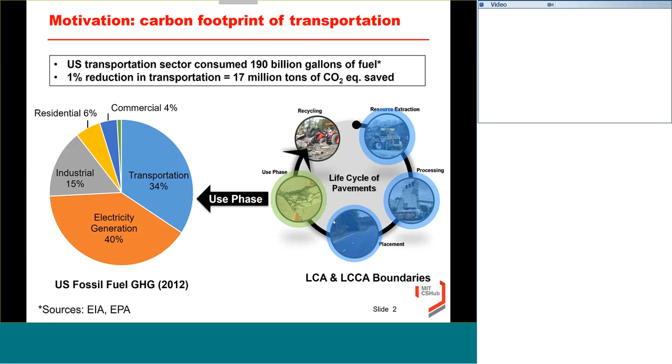On the right side of this slide is the life cycle of the pavement. We start off with some materials that we're extracting, we process that, and that becomes a pavement, which we're placing. When that pavement comes into use, it comes into contact with all the vehicles driving over it. What's actually happening is that vehicle fuel economy translates to pavement fuel economy. So pavements with more positive behavior towards vehicles induce less fuel consumption, and pavements with higher roughness, for example, induce more fuel consumption for those vehicles.

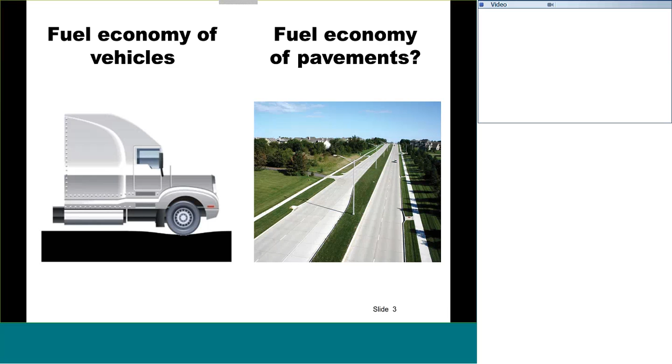This impact of pavements on fuel consumption boils down into two main mechanisms. One has to do with the pavement structure. So when, for example, a truck is driving over pavement, that pavement deflects under the weight of the truck, be it really small and minuscule. It's still a deflection, and there is still some energy that pavement absorbs from that truck.

You can picture this as riding a bicycle on the beach versus riding a bicycle on pavement. It's much harder to resist the resistance of the sand on the beach, same with walking, than it is on pavement. The same thing happens because of the heavy weight of the truck on different kinds of pavements, and that induces excess fuel consumption. Another mechanism is pavement roughness.

When you're driving on a smooth road, your car isn't bouncing up and down, and there isn't energy being transferred from the vehicle's vertical motion that's translated into excess fuel consumption. A much rougher road will induce more excess fuel consumption because the car has to bounce up and down, and there's energy lost in the suspension system. Whereas on a smooth road, you don't have energy going into the suspension, and that's not causing excess fuel consumption for us.

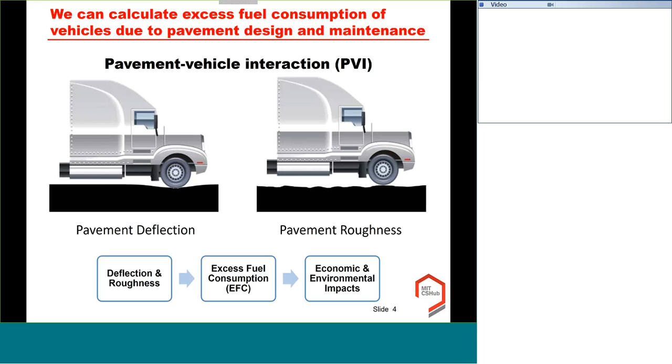So what we do is take the deflection properties, or the structural properties, of the pavement, and the roughness properties of the pavement, and translate them into excess fuel consumption for different vehicle classes and different roads. That translates for us into economic impacts or environmental impacts, whatever we're looking at through the life cycle of these systems.

So let's talk about deflection-induced PVI. One thing I should note is that roughness-induced PVI has been studied extensively, and there are accepted models for translating a certain roughness of a road to a certain level of fuel consumption for different vehicle classes. It's been studied and understood more because there are generally a few parameters that describe the relationship of roughness with fuel consumption: the parameter of road roughness itself, and the parameter of vehicle class. That's pretty much what breaks down the roughness impact on fuel consumption.

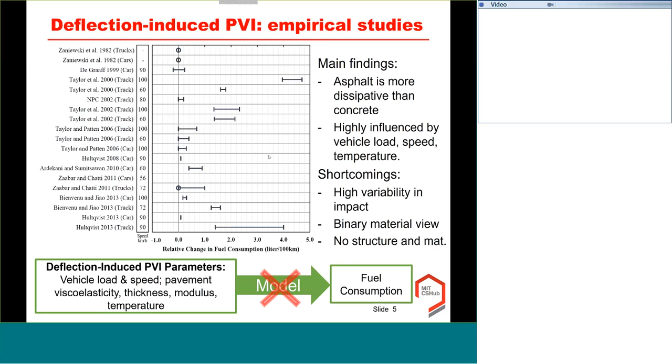What I'm going to present today is how we developed that model and what are the implications of this pavement vehicle interaction. The different elements of my presentation today will be around the development of this model for defining pavement vehicle interaction and its deflection impact, how we validate that model and the work we've been doing around that, and the work that's still ongoing.

I can talk about that too. We have implemented these models that we've developed for projects and for networks, and they have different implications, and I'll get into that and the sensitivity of these models.

Before I start, I'm going to jump into the takeaways and center my presentation around these. The first takeaway is that we can actually quantify this excess fuel consumption, be it for roughness impacts or for deflection impacts. We can quantify it with enough confidence to be able to make judgments based on our modeling.

We find that excess fuel consumption is quite significant when we compare either the excess fuel consumption cost compared to the investment we have to make initially to either rebuild the pavement or fix the pavement, or when we compare the life cycle impact of recreating a pavement versus all the losses from that excess fuel consumption and excess greenhouse gas emissions.

Another finding is that both the surface properties, which induce roughness, and the structural properties, which induce deflection, induce fuel consumption. Both of them matter, and they matter differently in different conditions, and I'll talk about that context sensitivity.

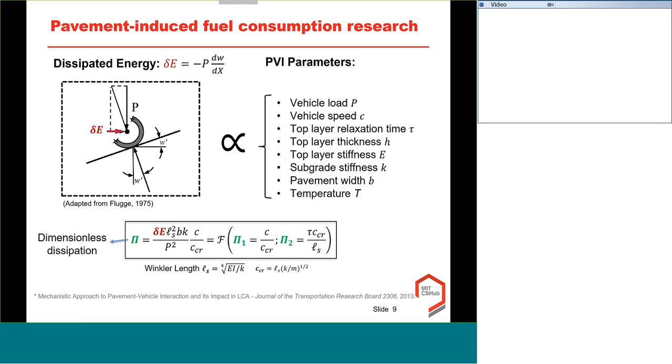All right, let's talk about model development. I'm not going to get into the depth of the equations. If there are questions, I'm happy to answer them. But the parameters that we have here are here on the right.

Like I said, there are many parameters that define what a vehicle behaves like and also what a pavement structure behaves like. These parameters include vehicle load, the speed, the relaxation time, which has to do with the viscoelasticity of the top layer, so asphalt versus concrete, for example.

The thickness of the top layer, the stiffness of the top layer, the stiffness of the subgrade, and also geometric properties about the pavement width and the ambient temperature or the pavement temperature. So all these parameters define our pavement vehicle interaction as far as the structural dissipation goes.

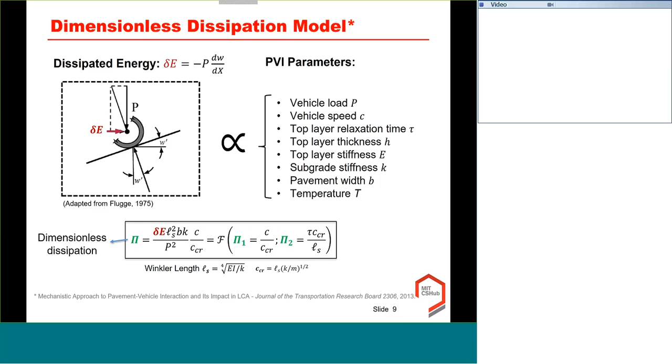So we have created this model that has a few different properties, but the main three advantages I want to talk about is that because it's a mechanistic model, it allows us to come up with scaling relationships between the dissipation, or that excess fuel consumption, and the parameters of PVI.

That scaling relationship is what I'm showing in this equation up here. And what it defines is that our dissipation form, or dissipation, either in dimensionless form or in terms of the dissipation itself, that delta E, is related to the vertical load, but not just linearly, with a square relationship. And it's related with an inverse relationship with the stiffness, the thickness, and the subgrade stiffness.

So, top layer stiffness and subgrade stiffness. What this relationship means is if you increase the load of a vehicle by 2, the amount that you're increasing that excess fuel consumption is by 4. So there's a power of 2 between the load and the dissipation. Similarly, if you increase the thickness of a pavement, you decrease your dissipation to a power of minus 3/4.

And if you increase the modulus of elasticity, that has a negative impact—increasing the modulus of elasticity decreases the dissipation. And improving the subgrade properties through K will reduce dissipation again. So it's a relationship, but what it helps us do is figure out what is the most important parameter that we can influence to change the excess fuel consumption, either within the structure of the pavement or within the vehicle.

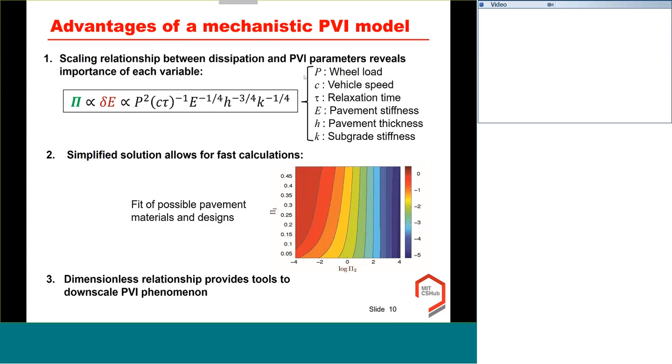The last important part of how we set up this model is that because it's dimensionless, we can scale the PVI phenomenon. Dimensionless properties of equations have been used to scale, for example, a jet down into something that can be put into a wind tunnel. We're doing something similar—using a dimensionless relationship to downscale this phenomenon, which happens at the scale of asphalt and concrete with 7-8 inch pavements, into something we can work on in the lab.

An important finding about the implications of different pavement scenarios and temperature conditions is shown in this graph. On the vertical left side I'm showing excess fuel consumption, and on the right side, temperature. These are data from California. Throughout a year, the temperature changes from around 5 degrees Celsius to 20-some degrees Celsius, and the impact of that on excess fuel consumption for asphalt concrete pavements or Portland cement concrete pavements is shown here—AC is asphalt, PCC is concrete.

We see that asphalt, because it's viscoelastic in nature, has a high dependency on temperature fluctuations—its excess fuel consumption is really dependent on temperature. If we looked at Colorado or another cold state, the excess fuel consumption wouldn't differ much between asphalt and concrete, because it would be much lower overall. But in this case, and in the majority of the US—we've done national studies as well—asphalt is highly dependent on temperature changes, and it's also dependent on speed changes. When a car is driving slower, it has higher excess fuel consumption than when driving faster.

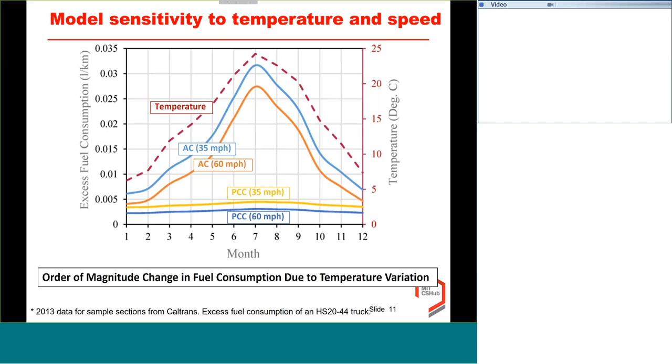But these are the things our model is showing, and we need to validate that for a real physical pavement model. A pavement is defined by a structure that has multiple layers, and these layers can generally be categorized or grouped into certain definitions.

Here on the left, I'm showing representations of what we'd expect to see in the US network, or roads generally, as a structure. We have a top layer that is either bound asphalt, concrete, or a mix of both—a composite section—and that's sitting on some soil. That soil is either compacted or treated with cement or asphalt, but it's generally an unbound base, sub-base, or subgrade.

So we're taking this two-layer representation of a real-life pavement and creating an experiment around it, shown on the right—two layers of polymers sitting on top of each other. We have a wheel moving at a constant speed, like a truck or car wheel would, and what we're measuring is the resistance against the motion of that wheel. I'll come back to this.

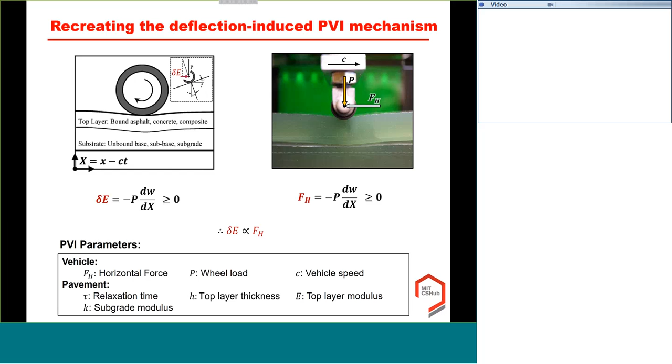The wheel load is what we simulate in our experiment. We have the vehicle speed, which we simulate as well. We have different materials that define different relaxation times - highly viscoelastic materials more like asphalt, intermediate materials, and materials that are almost elastic, more like concrete. We have worked on a variation of top layer thicknesses to investigate its impact on excess fuel consumption, and our different materials give us different top layer moduluses. We generally have one typical subgrade that we run our study on.

So our experiment is that wheel being moved back and forth on different pavement types and pavement thicknesses, and we're measuring that resistance to the motion of this wheel. Here in the video there's a little bump, but generally we worked with one thickness across back and forth.

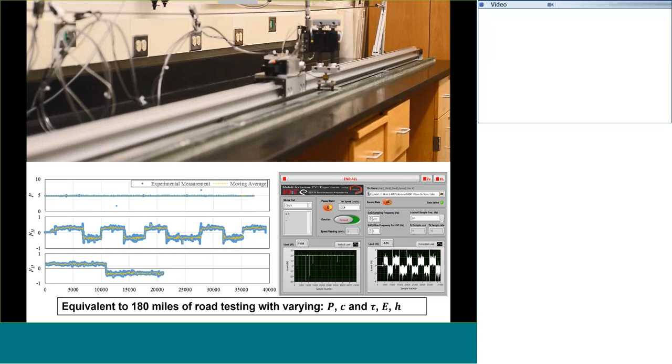A nice thing about doing this experiment indoors rather than taking a truck or car outside is that a lot of those external parameters, which we haven't even included in the experiment, are controlled here. The pavements all have a very smooth surface, so there's no impact from roughness. There are no temperature changes within the lab - it's very temperature controlled. A lot of other parameters, like the weight of the truck or the wind, which would change the fuel consumption in a real study, and impacts from tire and so on, are neglected by recreating this PVI phenomenon in the lab.

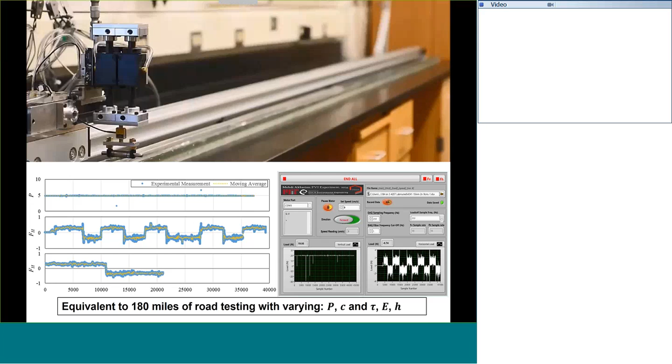If you were to upscale the size of this wheel and all the back and forth testing we've done across all these tests, it would be equivalent to a study that drove 180 miles while varying all these different parameters in real life. So that's a benefit from scaling this experiment down.

Another benefit is because we're using polymers here, we can actually look through some of them. Some of these polymers are transparent and birefringent, so we can use a polarizer setup, so to use photoelasticity to look at the stresses inside these materials. The setup is shown on the upper right, made up of polarizers and filters and so on, and on the left you see the wheel moving back and forth on this pavement.

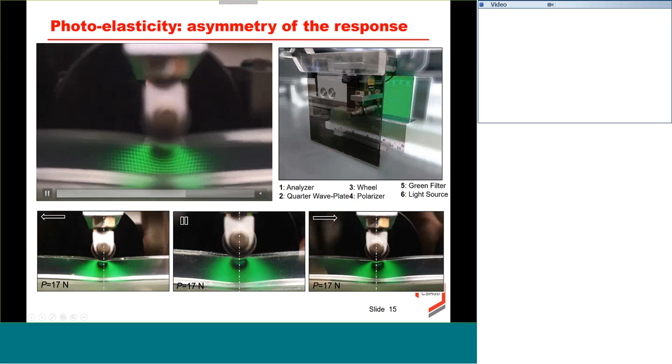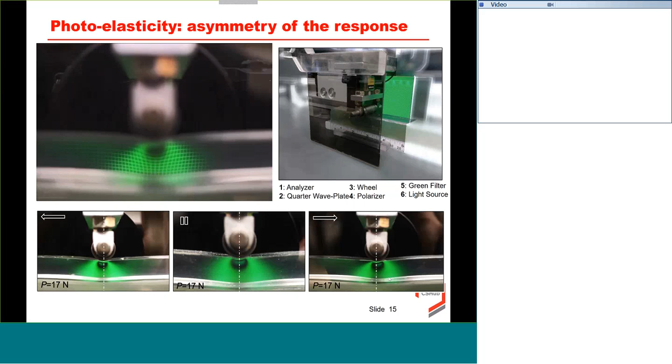It's changing direction quite often, and what it shows is the stresses inside the material. In the stills on the bottom, there's a higher body of stresses on the left side of the wheel, in front of it and behind it. When the wheel is moving to the right, you see a higher body of stresses resisting its motion, and you can see that really clearly when it switches direction in the video. When the wheel is stationary, everything is symmetric, but it's that combination of viscoelasticity in the pavement and the motion of the wheel that creates an asymmetry in the pavement response.

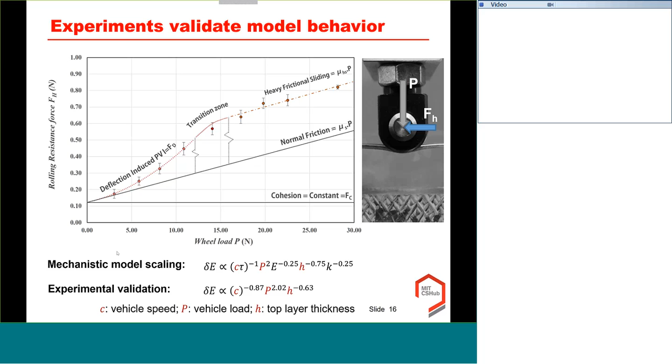In the quite elastic case, which represents concrete pavements, we also see good agreement between model predictions and experimental findings. This was validation from a laboratory experiment. There's also a validation effort in California with Caltrans, driving cars and trucks on pavements. We're involved in the modeling and comparisons with a couple of universities. I'm happy to address questions about that.

This model, validated experimentally, was also calibrated based on actual pavement data and used in project level implementation. Let me explain what I mean by that. Generally, when looking at a life cycle of a pavement, we start with some pavement structure that we think is right for the traffic it's going to carry.

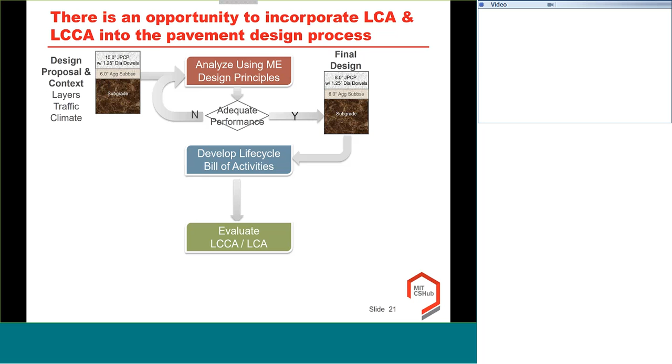Now what we're trying to do is bring the evaluation of life cycle cost assessment and environmental assessment into that performance judgment. So adequacy of performance has to meet the demands of the traffic, but also the cost demands and environmental footprint demands of the community, the DOT, or any agency looking at these roads.

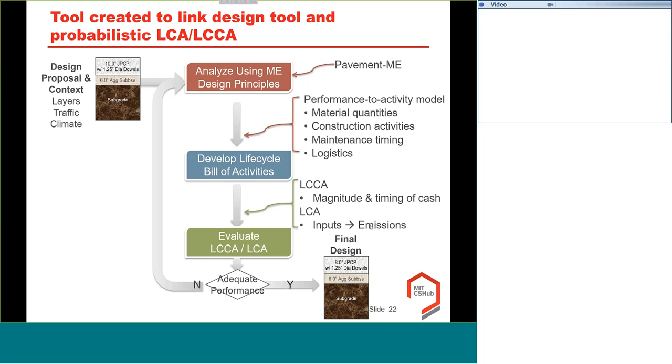We look at all the material quantities that go into the construction activities, when they happen, and what decisions have to be made. Then we figure out how much money goes into this life cycle and how much emissions come out of these practices because of this pavement design. We run these scenarios for many different pavement cases.

For example, here I'm showing the impact of life cycle cost assessment for a pavement scenario we studied with Minnesota. Here we have a concrete pavement and we're looking at the life cycle costs. We see that the majority of the costs are dominated by the initial investment on the pavement, and then there is some maintenance cost, around 16%.

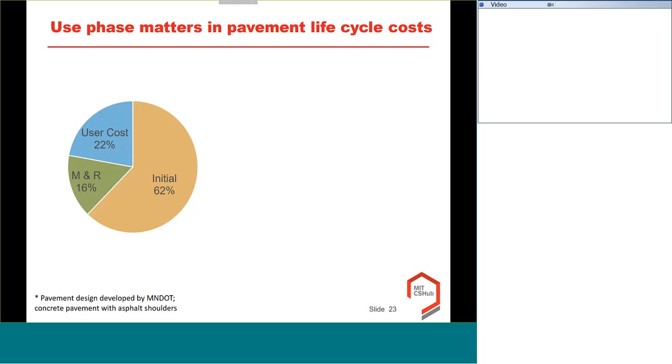What's interesting is that the cost applied to the user because of the quality of these pavements, or because of traffic delays they have to face due to maintenance, is equivalent to the maintenance cost as well. So there are some important findings for this study.

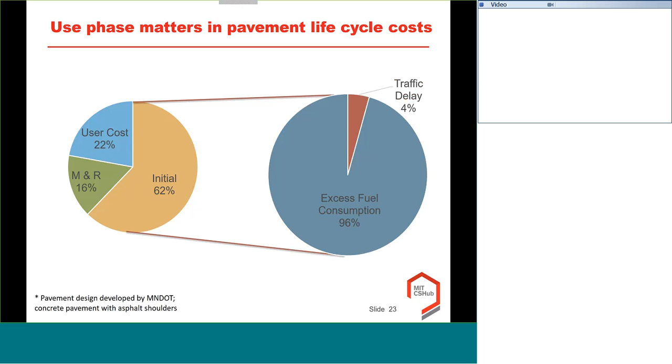We see the user costs are important when compared to the other costs that the DOT incurs. When we look at those user costs, however, we see that the majority has to do with excess fuel consumption, and very little with traffic delays. So that excess fuel consumption is an important part of the life cycle cost assessment.

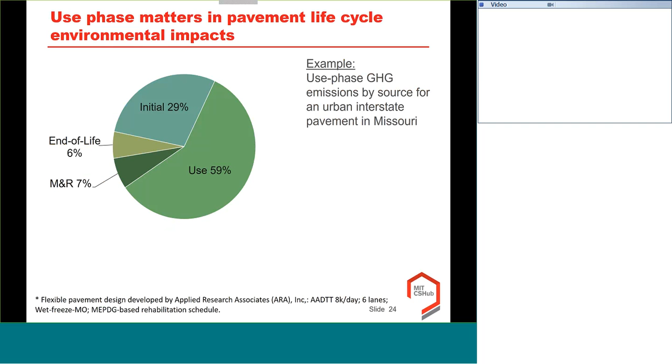We see this again with life cycle assessment. When we look at the environmental impact, there are cases where the use phase really dominates. The use impacts from excess fuel consumption, from all the fuel burned, from some of those delays, is more significant than the initial investment or the maintenance and rehabs we're considering.

When we look at the breakdown of that use phase, we see that some of the contribution of fuel consumption has to do with the deflection of those pavements, and some of it has to do with the roughness of those pavements.

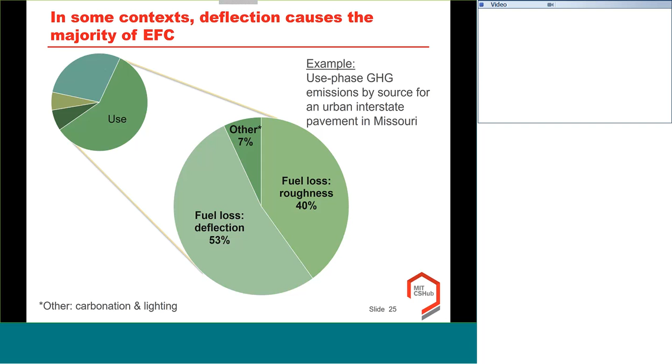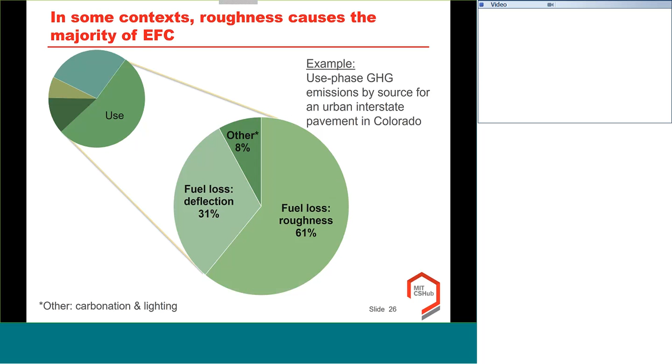We look at some other scenarios, and it's the other way around. Sometimes a pavement is rough but the structure is good, and sometimes the structure is not so good but the smoothness is pretty good. So there are different scenarios where the deflection and roughness parts of the PVI play different magnitudes in the analysis.

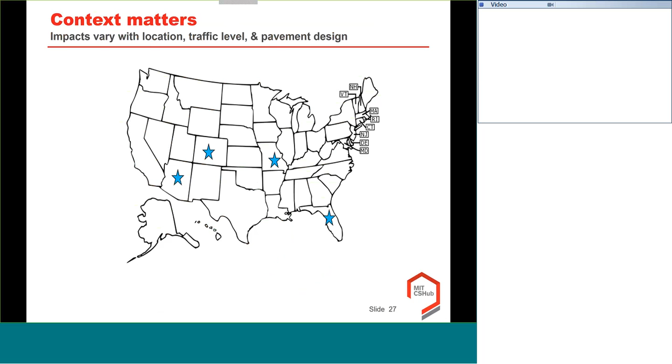Just to get a sense of how that works out in a U.S. network, we did studies looking at the impact of excess fuel consumption given different locations, traffic levels, and pavement designs. Again, we see that changing behavior between the use phase and the initial investment we make.

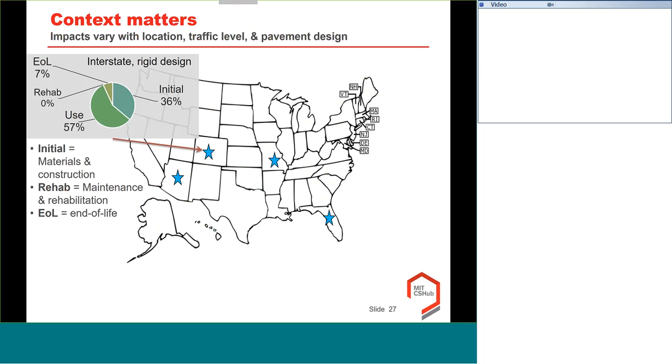Similarly, when we go around the U.S. and look at different scenarios, we see that these percentages and the importance of one to the other really change. That becomes important when we're looking at a roadway network, when a DOT is trying to make judgments about where to invest their money, which roads are the worst ones or the better ones.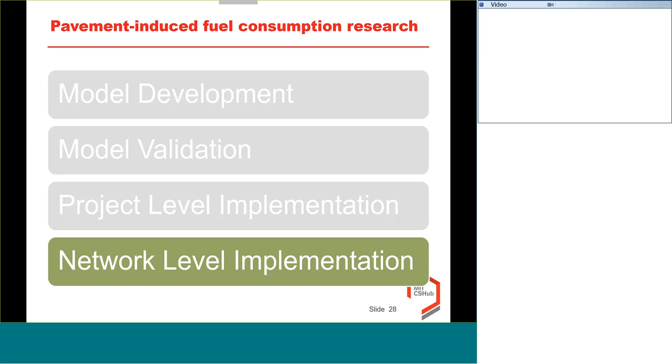I'll bring that context dependency of excess fuel consumption from different project levels back into a network level, and see what the implications of changes in the network are for these PVI models.

When we're talking about network, we're talking about a lot of data, so we have to put it all together to recreate the changing scenarios we expect. One of the changing scenarios is pavement roughness, which could change on a road-to-road basis and also on an annual basis. These are all input into the roughness-induced pavement vehicle interaction model, as well as traffic levels.

We have the total traffic levels and the truck traffic levels, and there is a difference in response of each one of these vehicles on fuel consumption. We also have information about speed for each one of the lane miles of a roadway network.

So all of that information goes into a roughness-induced PVI model. And then some of that, along with material properties for each one of these lane miles, the monthly temperature for the different locations that the roads are spread through, the thicknesses of these layers, and the types of pavements go into a deflection-induced PVI model. And that gives us a snapshot of how our PVI system, how our network is doing as far as inducing excess fuel consumption for cars and trucks.

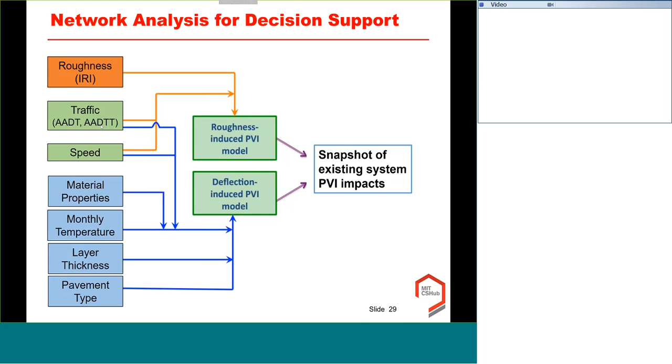So we did this with Virginia. We also did it with California. Here I'm showing the bigger study that we did was with California, and that's why I'm showing it here. And there are really interesting things that come out of a study like this.

So here I'm showing the excess fuel consumption added for cars and trucks on the Caltrans network. The Caltrans network includes interstate. It also includes some lower level roads that are not very high in traffic volume, for example. So what I'm showing here is excess fuel consumption in liters, and the greens are where the excess fuel consumption is low, and the red is where it's quite high.

And you see that we see a lot of red around the city centers, so around LA and also around San Francisco, which is something we expect. We have a high level of traffic there, and we expect to see a lot of excess fuel consumption given whatever road conditions that we have.

Something else that pops up is the main interstates that connect the north to the south. Again, we see the traffic volume is quite dominant here, and that is actually due to truck traffic, and we see the impact of that also with roads that lead out of California into the neighboring states, either on the northern side or the southern side.

But we can look at the map and talk a lot about what is important, but overall, when we look at the excess fuel consumption that happens on Caltrans' network, it's around 21 million liters of excess fuel that's due to PVI. And compared to how much fuel is used on Caltrans' network, that's around 2.5%. So just the state of these roads is inducing around a 2.5% increase in fuel consumption.

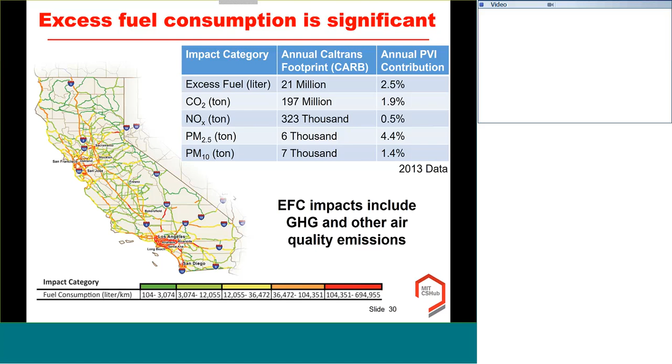Let's assume that we had enough money to maintain or rehabilitate about 1% of the network, which is what I'm showing on the left side here in that table. So the network impact reduction, we have enough money to do 1% maintenance within this network. We can select the roads that we're going to maintain randomly. For 1% effort, we're going to get 1% return.

We can select them based on how rough they are, which is a typical practice in a lot of states. So roads that are very rough get maintained first, and then roads that are smoother kind of wait until they get rough. And this is what I'm going to bring you along to the graph on the right.

So on this graph, I'm showing vertically on the left the excess fuel consumption that we're seeing in California, and it goes up to about 700 million liters for this network. And on the horizontal, let's just look at the bottom horizontal, I'm looking at the required network maintenance to bring this excess fuel consumption from that 700 million down to 0.

So if we maintained every single mile, which is 80,000 lane kilometers, around 50,000 lane miles, we would bring all that excess fuel consumption down to 0. We have different paths to take this route. One was that we would select our roads randomly, which is the orange line here. So if we select, let's say 20%, we have enough budget to maintain 20% of our network, we get a 20% response or return from that random selection.

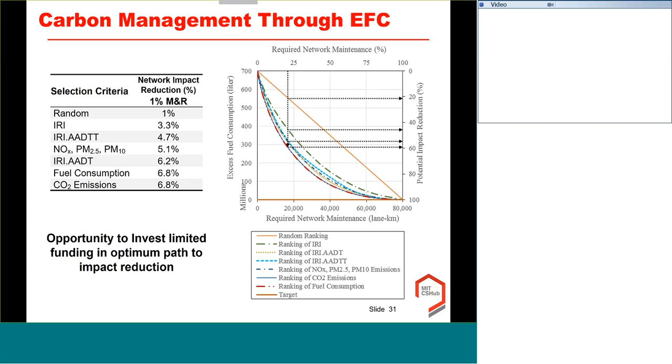So that use phase, just given its importance within the life cycle, is a really good descriptor of what roads are good and what roads are bad and where we should invest our money. But it's not the whole picture. There is a level of spending that has to go into a road to bring it into good condition, and there are roads that have high demands for that expenditure, or they have low demands. It's hard to make a judgment just by looking at that excess fuel consumption.

So we've developed models and are currently working on enhancing them with a couple of different states, where we take that information about the current state of the system, as I described for California, and we take all the available maintenance actions open to us. So, for example, overlaying a pavement or tearing it up to make it last a couple of years longer, or a long while.

We can project how these different activities that we do on these pavements will last. Some will last a couple of years, some will last many years, and we can look at that through a deterioration model perspective. We can also look at the prices and how they develop over time.

It's not just about the pavement condition, but it's also about, if I make a decision to do something 20 years down the road, is that going to cost a lot 20 years on the road, or is the cost going to be quite similar to where we are now?

And lastly, each agency, each DOT, has a set of objectives and goals that they have to meet. These could be around the quality of the pavements, where they say, I want 90% of my pavements to be great, or at most 10% bad roads, or something like that. Or, I have a $50 million budget and that's it. So these objectives and goals also have to feed into our model. That's what we call an allocation support tool, where we have some goals and we try to maximize our expected performance. That's how we select projects to improve the overall return from an investment.

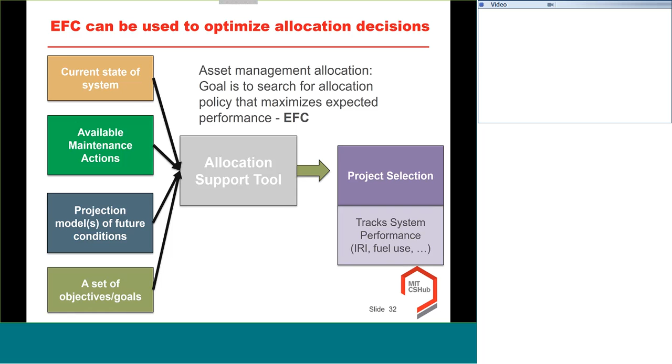So with that, I'm going to come back to our key findings again and frame the presentation so that if you have questions, we can go back to it. The main finding is that we can quantify this excess fuel consumption, both for roughness and deflection, well enough to make judgments, either at a pavement section or project level, or at a network level, where we can compare pavements against each other and say this is a better pavement for this job, or here we don't have a lot of traffic, maybe we can do something else.

We saw that the excess fuel consumption is significant on its own when we compare roughness and deflection, when we compare cost or environmental impact. It's just something big that has to be considered either through policy or through engineering. We saw that both surface and structure mattered - that's roughness and also the deflection or stiffness of the pavement. And lastly, this excess fuel consumption, given its importance and its role within the life cycle of the road, can really be used as a management metric to improve the design and maintenance decisions that DOTs and agencies have to make.

So with that, I'll just open it up to any questions that you may have.

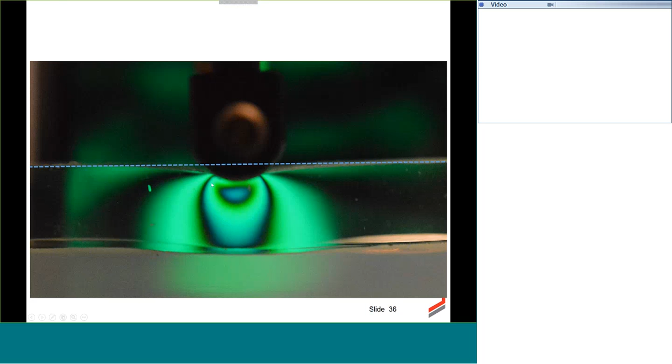That's a great question. I'm going to run into some secret slides I have prepared—let's see if my computer allows me. All right, we have to go through all the slides together because it's not letting me get out. So, that's a great question.

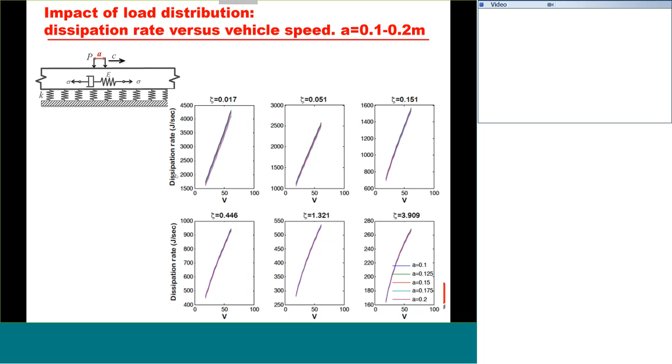It's on the texture scale, not on the deflection or structure of the pavement scale. Does that answer the question? I hope. I don't see any follow-ups. I think so, but of course if there's a follow-up question, please feel free to submit it via the Q&A.

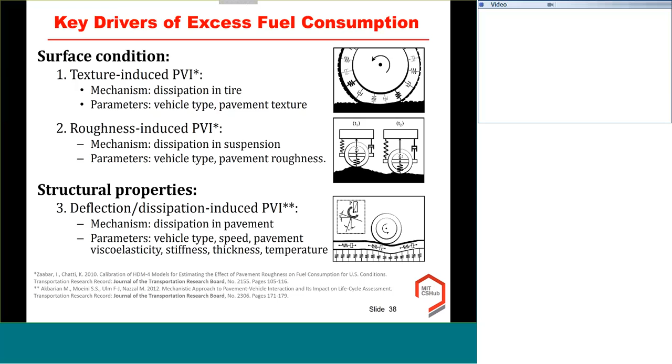Let's see, next question. On about slide 19—if you can find slide 19—you were showing a plot and indicated that it shows the model is forecasting close to actual performance. The number of points were limited. Have you extended the comparison to more comparison points?

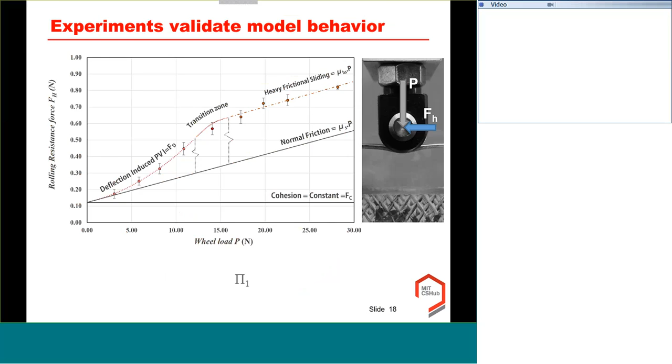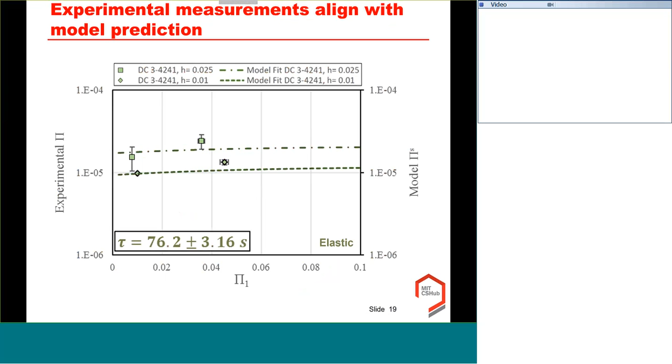Yes, you're right, the number of points is limited on slide 19. To answer the two questions, I'll answer the second one first: no, we haven't extended the study on any of these materials. I know there are only 4 points here, but this is a collection of many experiments that have boiled down into 4 dimensionless points on this graph. That's one thing. The second thing is, in this elastic material case, it was really difficult to create this sample. If I show one of these samples—excuse my computer that isn't letting me jump slides.

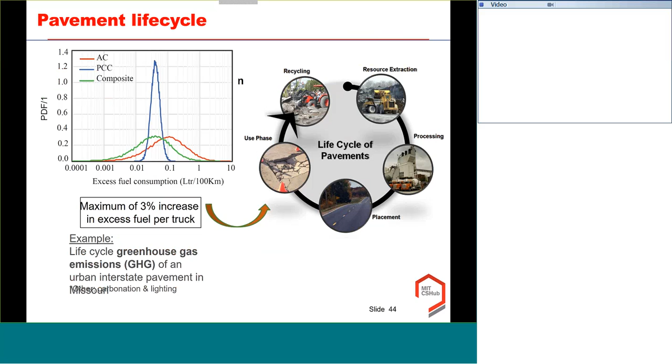Give me one moment. Maybe it did. Okay.

All right, so this kind of shows the samples. The samples are about 4 meters long each. So here you see one sample, from here all the way to the end of this long bench that we have, and I had to pour each one individually in.

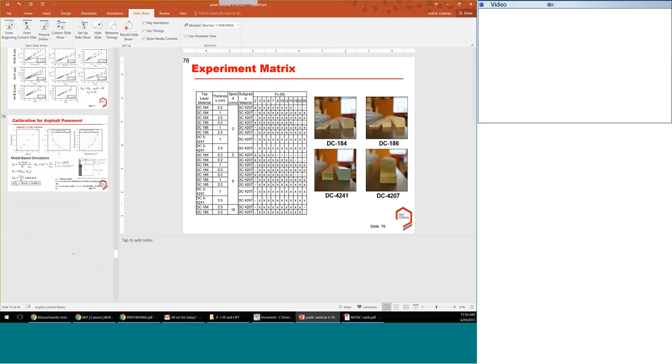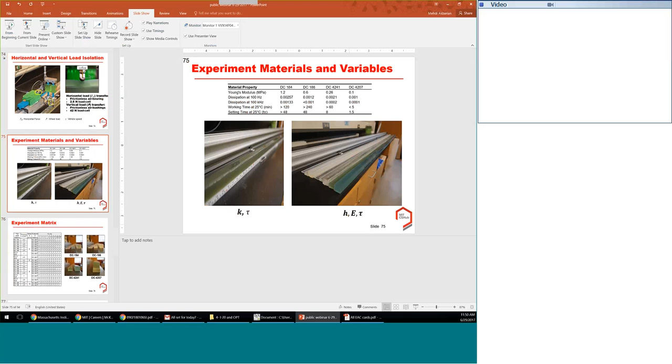There were many limitations with pouring of these samples. I don't have the right slide, but just because of the size, we couldn't put them in the oven, for example. So there were more limitations on the elastic case, which are these 2 green ones on the right. The 2 results in 4 points, and the 3 results in, I think, 8 or 9. But yeah, it was quite difficult to create more points for those.

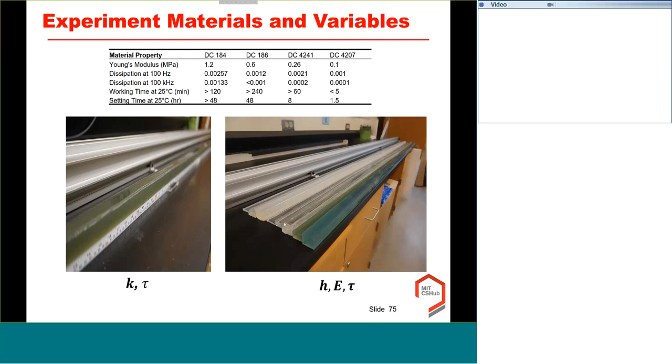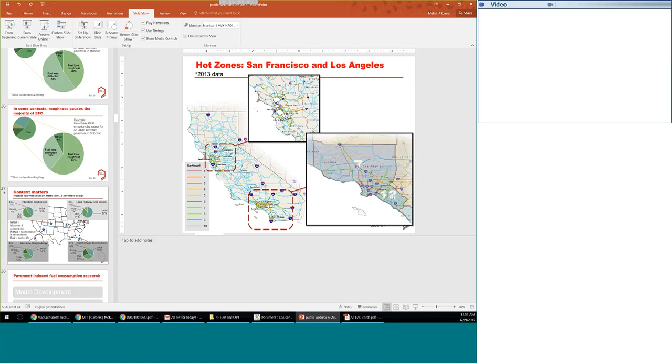All right, let's go back to one of those figures so we can compare. I don't know if you're talking about the maps or the individual cases, but I will talk about the individual cases, and if we hear that it's the maps, I'll get into that. He's saying yes, the map. All right, great. Yes, thank you.

All right, so let's see. Let me put some of these slides together so I can.

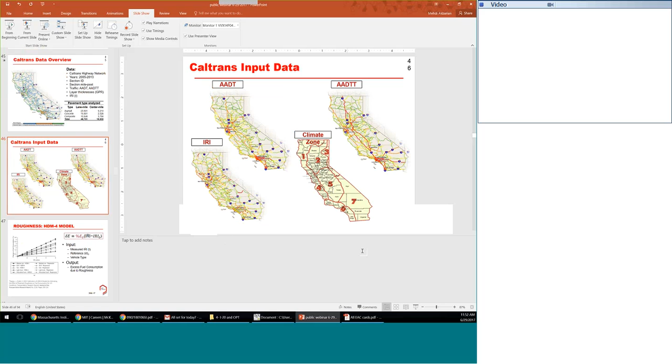Yes, so there are some indications that we can follow and see what was happening in different regions. I said that there's a lot of excess fuel consumption around the cities. So here on these 2 maps, AADT is the total traffic volume, AADTT is the truck traffic volume. So there's an indication that the route that has a lot of trucks on it or around the cities, there's going to be a lot of excess NOx or particulate matter emissions, and also greenhouse gas emissions. Or where we have a lot of passenger or total traffic, dominated by passenger car traffic, we have a lot of impact, again, around the city centers.

That's one indication. Another indication we have is the climate zones. California has many unique climate zones within it, ranging from quite hot to cold. Given where you are, if you're in the cold climate, the deflection-induced PVI would be smaller than if you're in the hot climate. So that's one indication of the climate zone impact. And then on the left side here, we have the roughness. Where you have high roughness, you would expect to have high excess fuel consumption from roughness in these cases. So we can follow each one back and see why it happened.

But let me step back and just talk about deflection and roughness-induced PVI. When there's high load, high temperature, and low speed, deflection-induced PVI dominates. When there is high roughness and high passenger car traffic volume, you have high roughness impact. So it kind of boils down into two. Passenger cars are not much affected by deflection-induced PVI, but trucks are highly affected. Trucks are less affected by roughness than cars, and cars are highly affected by roughness. The reason behind that is you can think about cars being built to absorb the bouncing of the car, the energy transferred from a bad pavement to your back. A truck is not built to do that, so a car absorbs that energy so you don't have a bad ride, but in the back of a truck it's really uncomfortable.